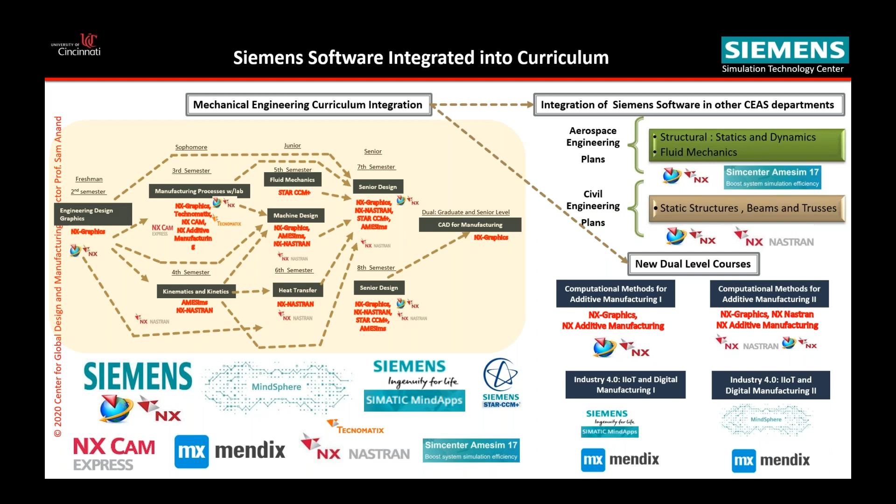So I'm going to talk about what's on the right side, more about the additive manufacturing and the digital manufacturing part. And then in the latter part of the presentation, Professor Kim is going to describe the integration into the undergraduate curriculum.

So quick outline here. We'll talk about the Siemens Center website and how we integrated Siemens NX tools into our geometric modeling apps that we use in our course, and then into additive manufacturing tools and apps that we use in our two sequence courses here. And then we'll talk about other tools that we developed in additive manufacturing compensation, lattice structures, and so on. I will describe specifically industry outreach and how these tools bridge what happens in the industry and how we are relating what happens in the industry to bring it back to the classroom.

Once in the latter part of my presentation, I will talk about the IoT and the digital twin integration in design and manufacturing with two examples of actual industry examples that we bring back to the classroom. So that is the agenda for my part of the presentation. On the right side, you see the set of menus and tools and examples of what we've integrated. That's what I'm going to go through.

So basically, if you look at it, on the right side, you see the manufacturing courses we have integrated. We have an undergraduate course of manufacturing process, a dual level course, which is a senior and a graduate level course on CAD for manufacturing, and computation methods in additive manufacturing 1 and 2. And eventually a dual level course in Industry 4.0 digital manufacturing. Now, some of these courses are completed, and some of these courses are in the planning mode.

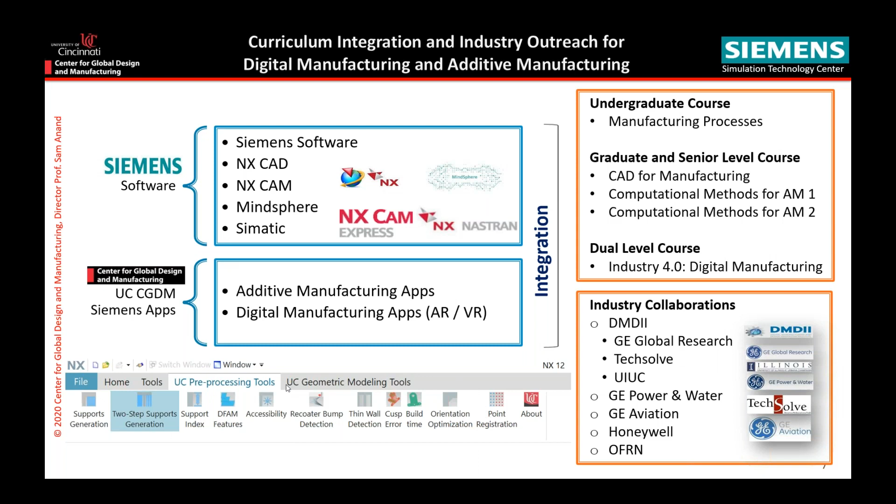The kind of tools we used on the Siemens tool set, you see on the right hand side, we use NX, NX CAM, NX CAD, MindSphere, Simatic. And then we also look at how we bring together some of these tools into the apps where it relates to industry. So I'm going to describe some industry collaborations that you see on the bottom right-hand corner. So those would be the examples that we bring back to the classroom. At the bottom of the window, you see an example of all the tools integrated into NX, some of our tools here, and I will show you some of these menus as we move along.

So first thing is we have a Siemens Center website. Obviously, all our tools, all our apps are sitting in this website, with case studies, examples of classroom integration that's replicable, and information on how to download this and install it and so on. All this is available at the UC Siemens Center website. It has a link to Learning Advantage from Siemens, so you can use either the UC website, the university website, or the Siemens website to download some of these tools if you wanted to.

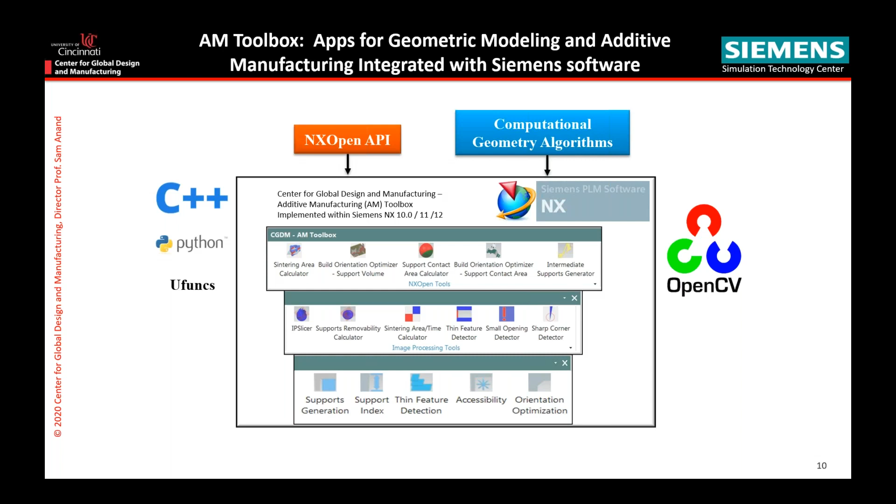So how do we go about doing it? Just a quick overview of the AM toolbox here. We integrate the NX API methods using C++, Python, open source software, or OpenCV. We integrate with computational geometry algorithms. And what you see are the menus that you would normally see on the Siemens NX. You would see some of our menus, so you can use it for the additive manufacturing apps here. So we write these apps, and basically they are DLL files that you drop in so that you can see these menus populated on the NX software itself.

So examples of geometric modeling apps here. This is taught in the CAD for manufacturing course, where we teach computational geometry, geometric modeling, curves and surfaces. Students are given assignments where they develop the algorithms and do the homework, but they can come back and verify it using the apps we develop. So it gives them reinforcement of what they learned by doing the homework and coming back on each of these things as part of the class.

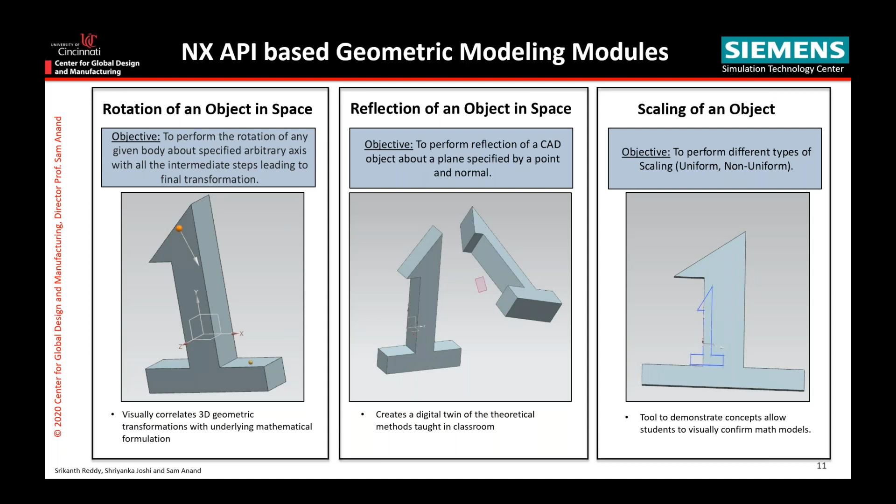And these are fundamental transformation methods here that we teach, so how one would go about doing it. All this is integrated into NX so they can seamlessly view it.

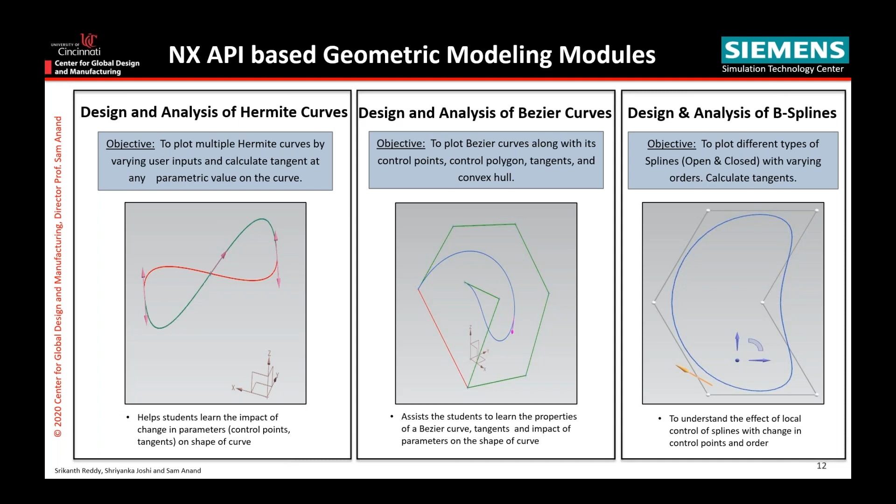Similarly, we teach a whole lot of information on curves and surfaces, everything from Bezier curves to B-spline curves in the first course. Students have an opportunity to take the homework and work on it in their own programming language, MATLAB or Python, but they can come back and verify these methods using the apps we develop here. All these apps are available within NX so they can verify their homework.

Example of surfaces, we teach different types of Bezier, B-spline surfaces, and so on. These are our own specific apps integrated with GUIs and so on, that students can use to verify it and play around, not only to verify their homework, but understand the concepts much better.

The idea of simulation is to give students an ability to play around, to look at what-if scenarios: what if I change this, what happens to it? That is crucial for them to understand and master the learning process here.

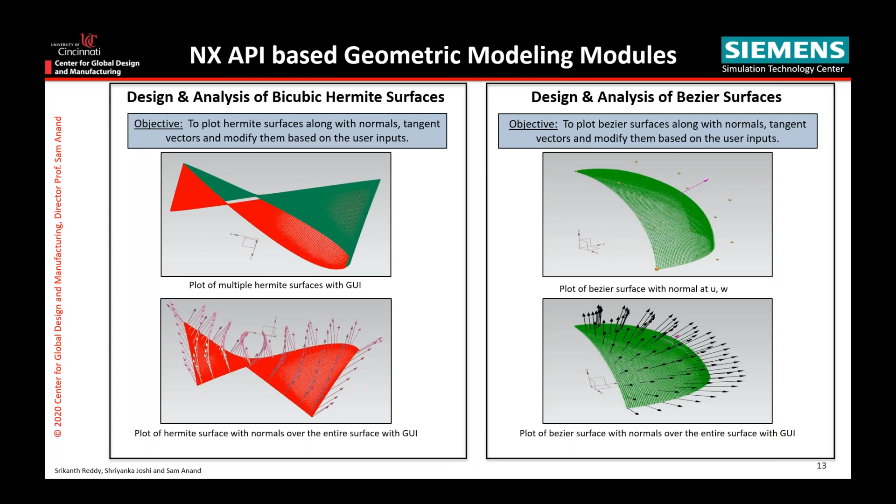So moving on, those were the geometric modeling apps introduced in the first course. In the second course, the additive manufacturing one, there's a whole bunch of additive manufacturing apps, including support tools, DFAM tools, support generation tools, build parameter tools, and so on. And then our own producibility index that tells you build orientation optimization.

All these apps are developed internally by us, and they work on any kind of part. You can take an STL file, or a neutral file, push it into NX, and then work on it from Siemens NX. So these apps are integrated into Siemens NX.

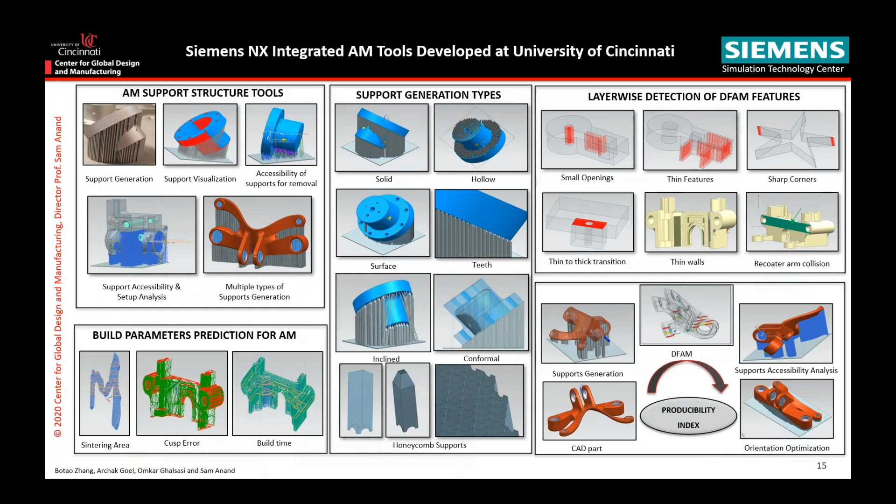More examples of these are the apps that are integrated, and basically you can see these apps as you work and as you see all those things.

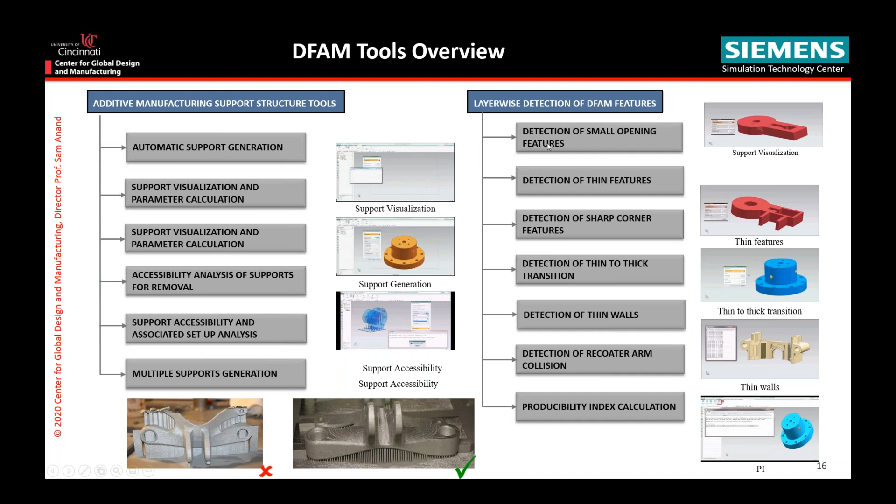So the bunch of apps you hear about, support structures, these are DFAM apps, and all of them are integrated. Here's an example of a DFAM app working. You can see how it goes through the process, does a layer-by-layer analysis, and then detects all the features. This is already integrated into NX, and that's what you would see.

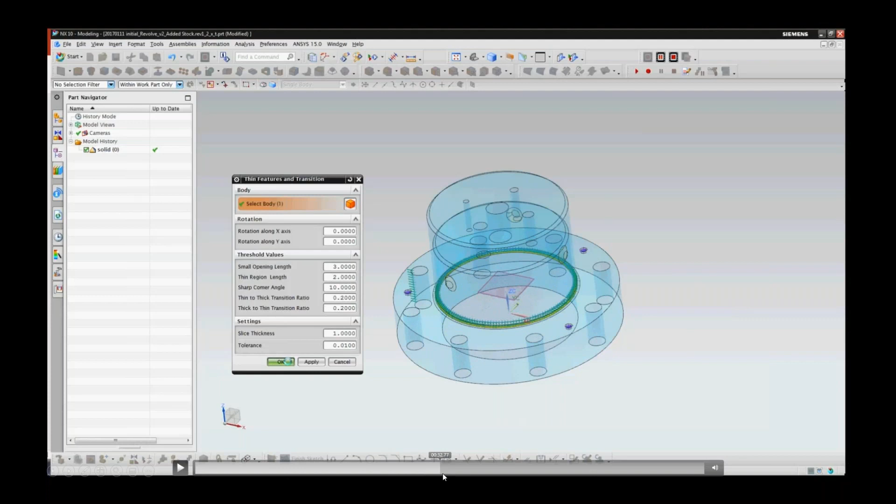So you can see the color-coded DFAM features that are highlighted here. That input is given.

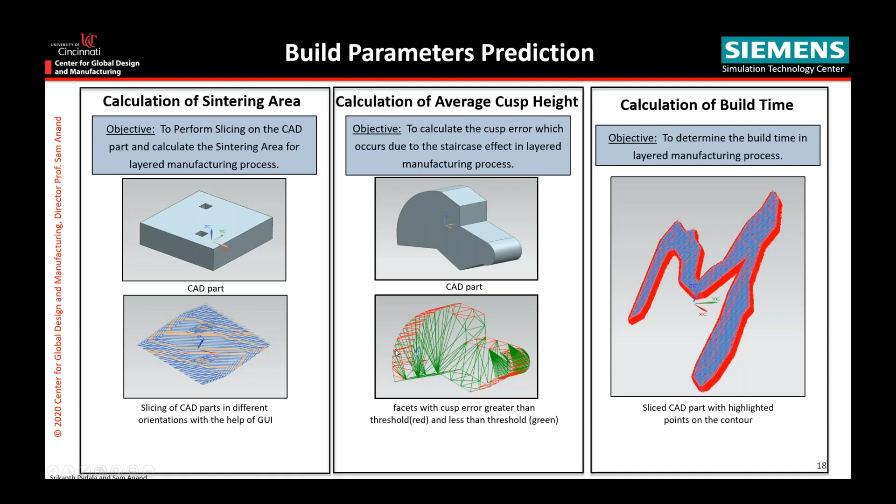We have more apps for calculation of sintering area, cusp height, and build time. All these are integrated. You can calculate the actual build time, cusp error. All this is working on the NURBS geometry or the CAD geometry of the part itself, so we're not working on STL files.

So all this is brought together into one final metric, what I'm going to call a producibility index, that gives us an idea of how to do build orientation optimization, so you can find the best build orientation for the part, particularly in metal additive manufacturing.

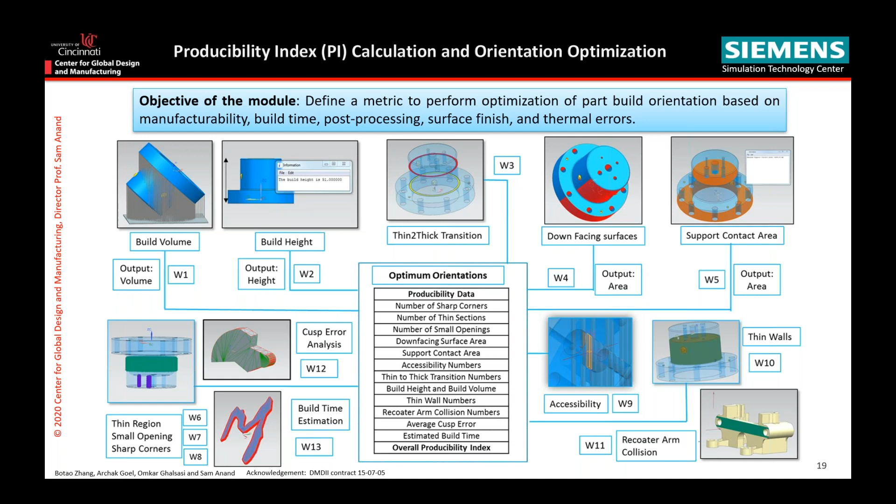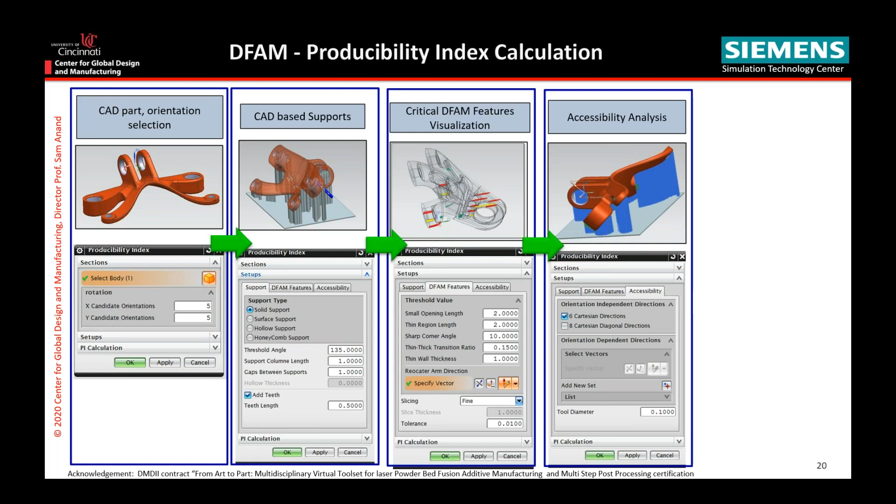Here's an example of the flow that will happen. You take the part, develop the CAD, and develop the supports there. Once you develop the supports, you look at DFAM parameters, do the support accessibility for removal of supports, and finally the orientation optimization. So this is how the producibility index is going to look like.

This basically goes through and looks at developing the part, the orientation, and then the build parameters. Finally, you can look at the producibility index by doing an orientation optimization here.

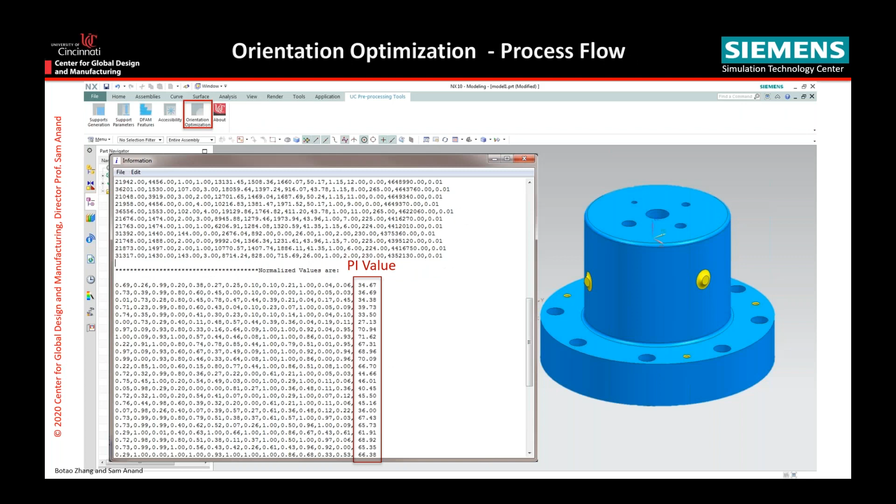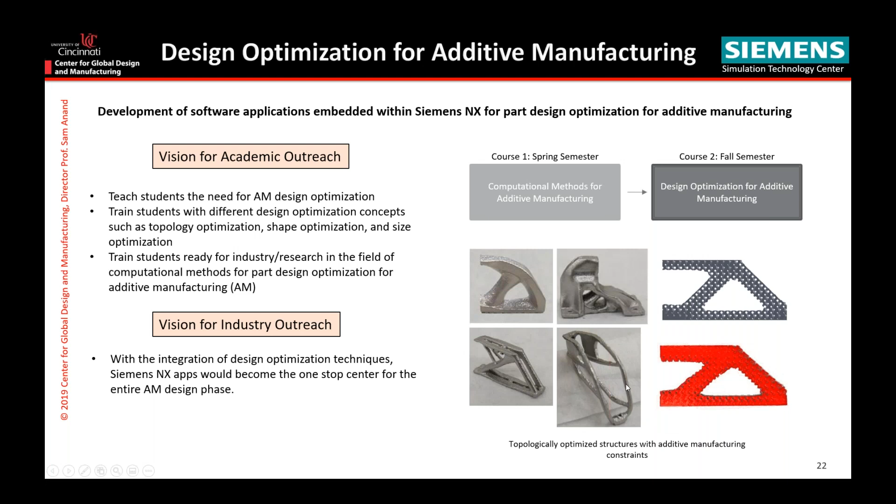So those are the set of tools, and we've developed a whole bunch of tools for design optimization, including topology optimization, lightweighting parts, multi-material parts, thermal compensation, build orientation for thermal compensation, topology optimization for AM parts specific to additive manufacturing, lattice structures, and multi-material lattice structures.

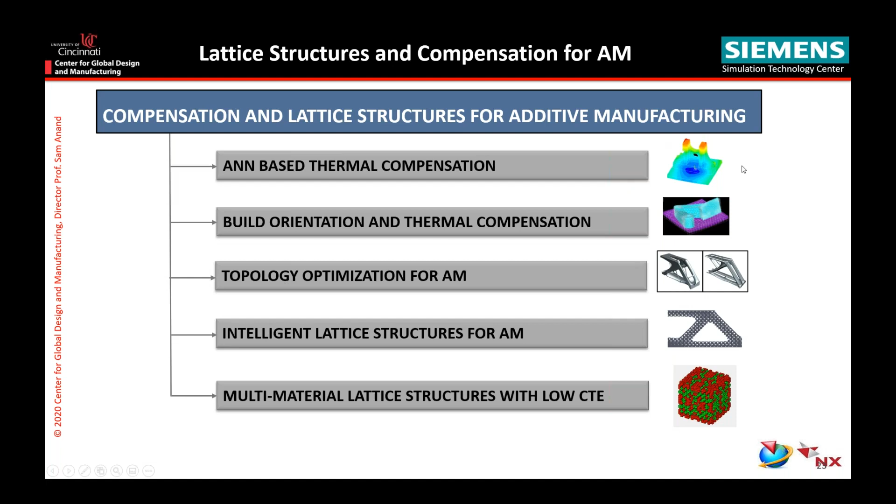We teach this in the second course of additive manufacturing. So that is our objective. Here is a repertoire of what you would see in these apps.

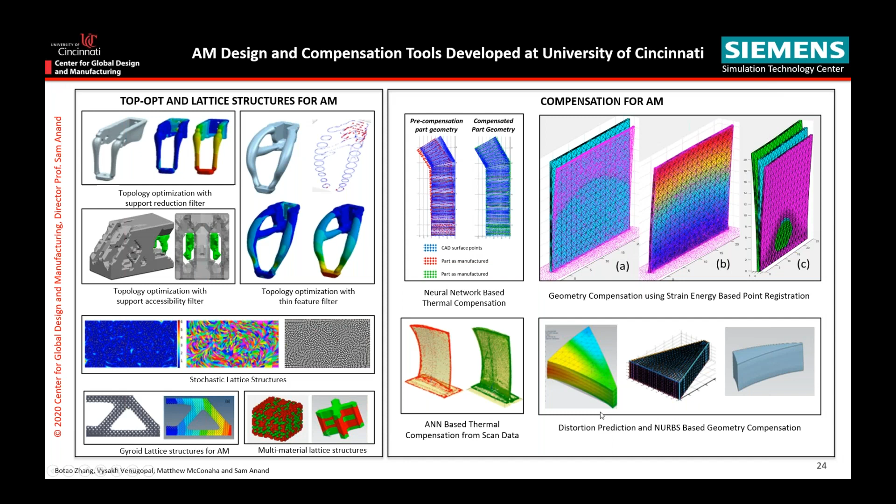Some of these are topology optimization specific to additive manufacturing with DFAM constraints. These are examples of lattice structures with multi-material lattice structures or stochastic lattice structures. This is an example of how we predict thermal deformation and do thermal compensation on the NURBS surface itself. We teach all these things based on the work we've done and on the industry contracts we work on.

To bring this all together, where does it all connect to the industry? These are examples of 4 industry contracts. This is a DMDII, a UI Labs federal government contract that we worked on with GE Global Research, an 18-month project on developing virtual certification of the metal powder additive manufacturing process. We worked with GE, University of Cincinnati, and Urbana-Champaign, and a couple other partners.

This is an example of work we did with GE Power and Water, using some of the apps I talked about and using orientation optimization. This is sponsored by Honeywell - a research contract where we're using compensation based on neural networks. And this is a contract from GE Aviation on using DFAM analysis.

So we are bringing together some of the apps that we develop into the industry, using it for industry and bringing that learning back to the classroom. That's the whole idea here.

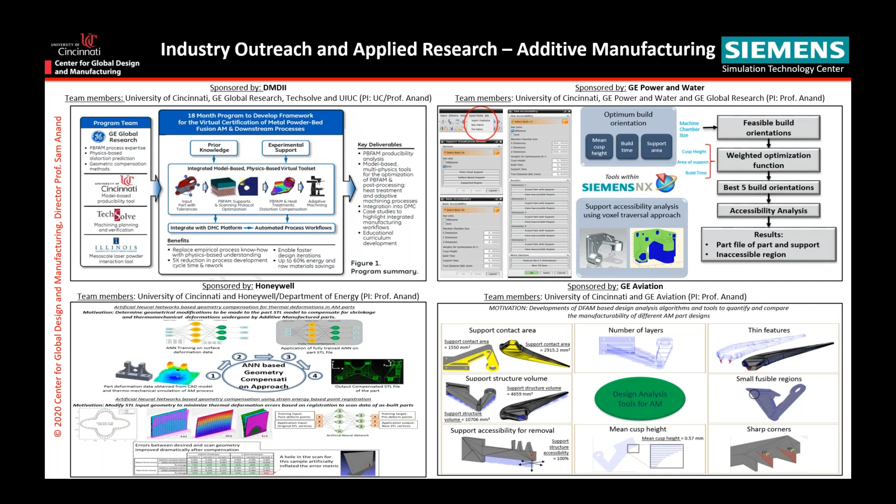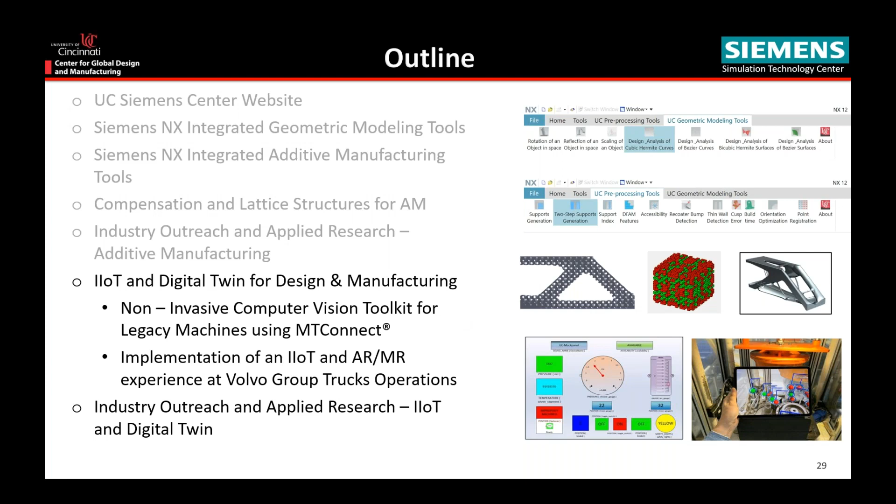So the second part, I've got a few things to talk about. Since Gil talked about digital twin and digital thread, we do a lot of work on IoT and AR, VR integration into the classroom, and we're developing a separate course on Industry 4.0, 5.0. So that is the course I'm looking at here.

We are looking at a separate course in Industry 4.0 where we're going to use Siemens MindSphere, SIMATIC, and Mendix for looking at IoT and AR, VR integration on the factory floor.

Just to give you an example, this is a DMDII project where we used computer vision cameras to look at older legacy machines and gauges and parts where there's no sensors, then video record those particular machines and the console. In real time, we analyze those values and push them through MT Connect, which is a standard, so that people can view it. We worked with Raytheon and Faurecia on this project.

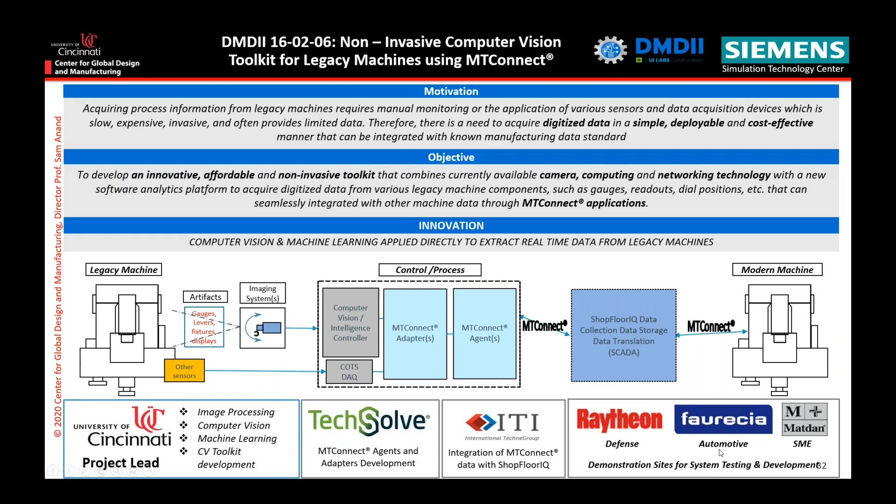Just to give you an idea, this is how it looks. This is a mock panel with all those values. These could be the gauges on a CNC console, or this could be the LCD panel on an injection molding machine.

So what we have is a Logitech camera looking at it - a $200 camera - recording images at 30 frames per second, analyzing each frame, getting the values, and pushing it into MT Connect. And this is the MT Connect output that you would see in an office far away or in a remote location. It gives you an idea of how we can acquire data from legacy machines.

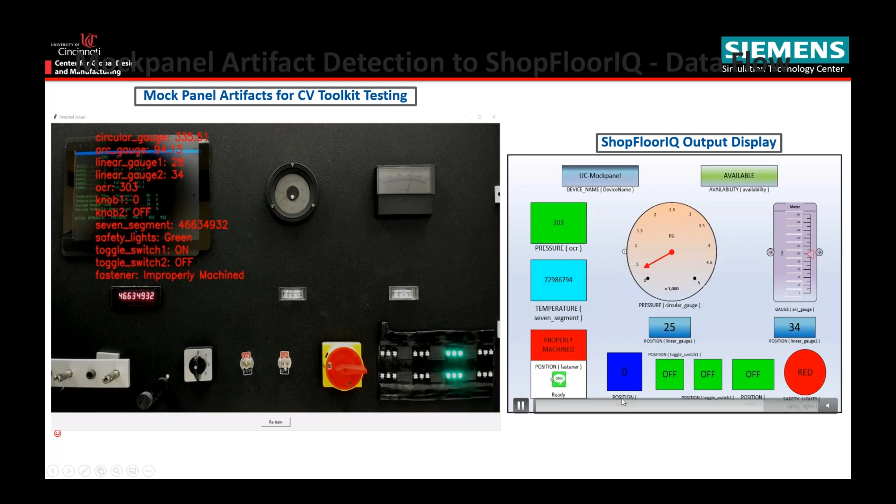So this is one of the projects we are trying to bring together into the classroom. A second project uses mixed reality, where we're using AR, VR, and mixed reality context so that you can use an iPad to look at a machine and gather sensor data on the fly. This is the thesis just completed by a student here.

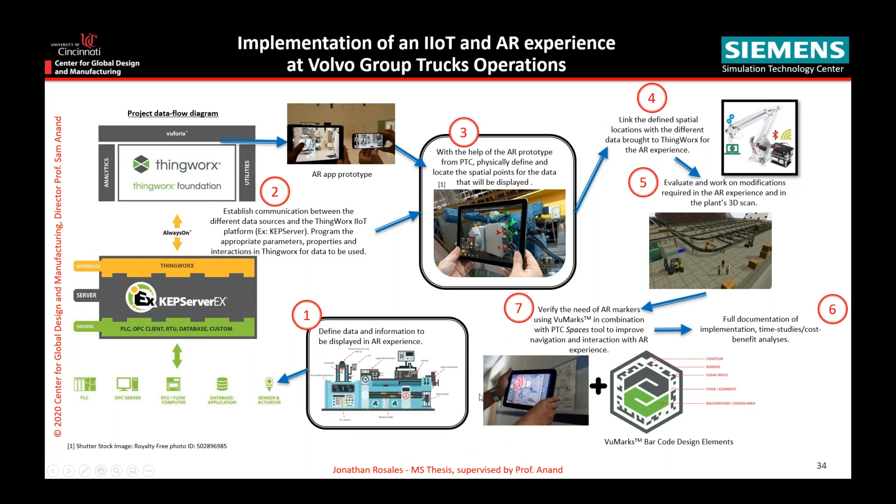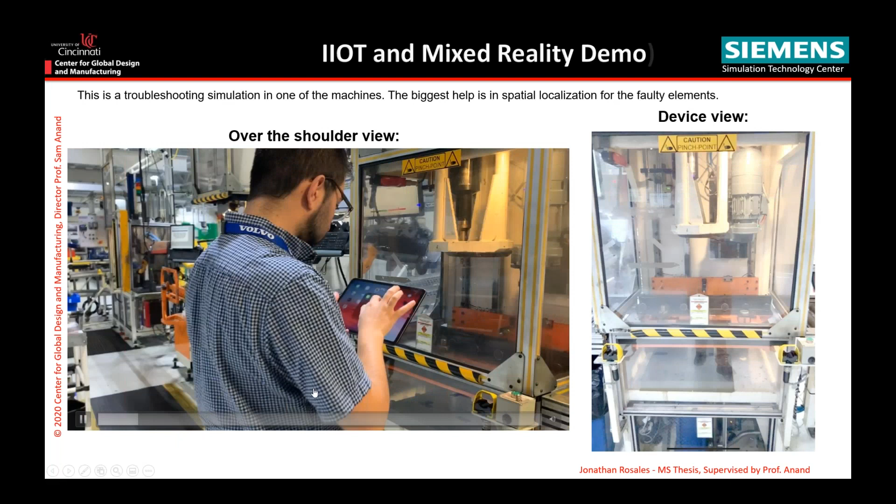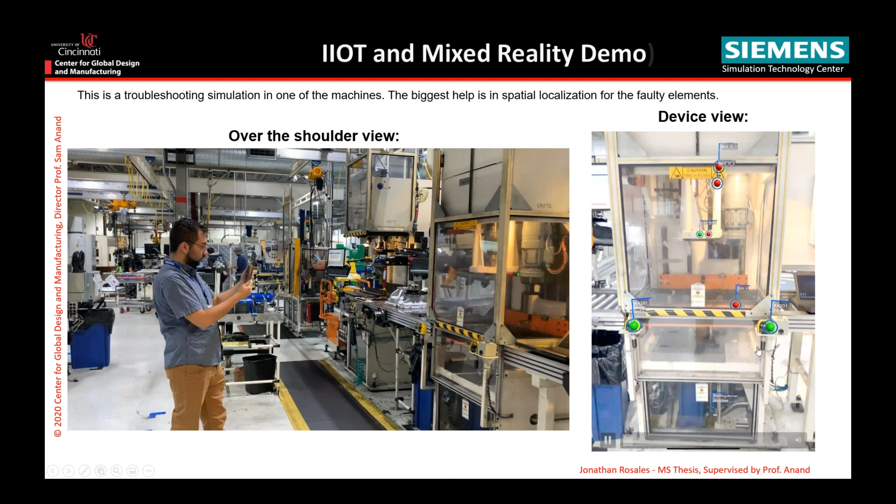Let me show you one video - this is a video of the student actually at a factory, the Volvo factory, looking at that particular machine. He's going to use his iPad to look at this machine and bring all the sensor values into a mixed reality interface so that all those sensor values can be looked at right there, and we can do it for any machine. All these green and red balls that you see are the sensors and their locations, and those are the values here - they come up automatically, pulling it from the cloud in real time.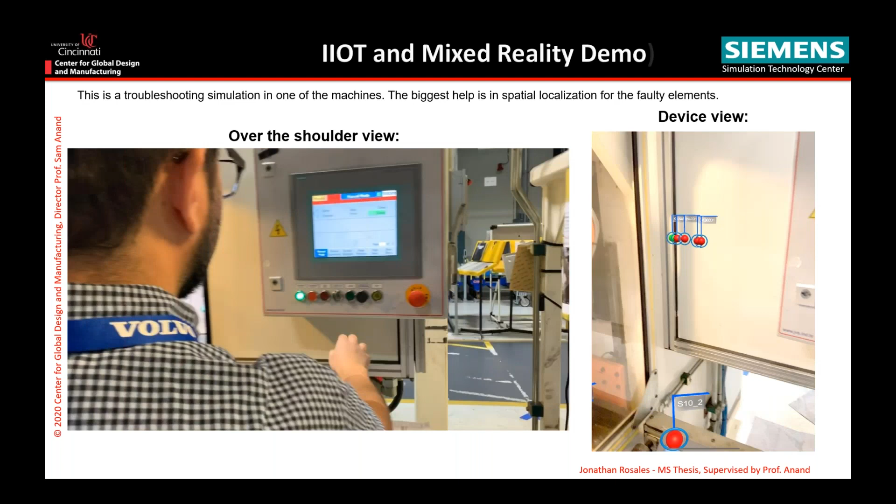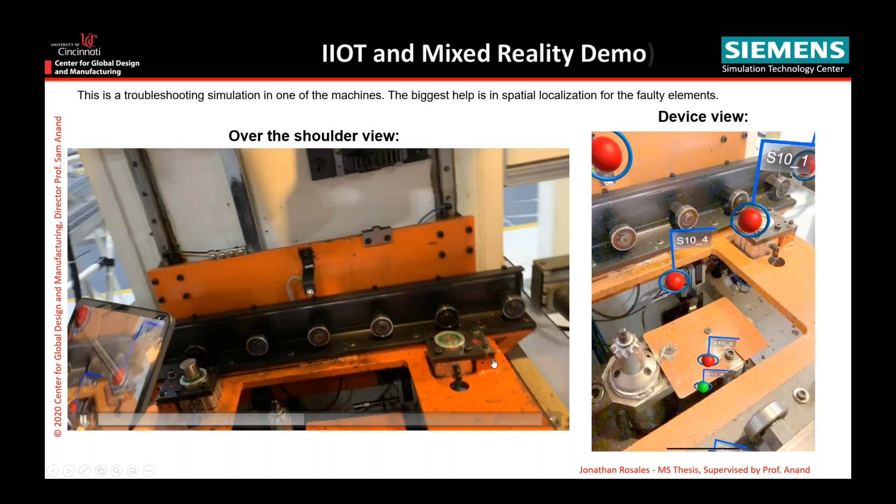So this is a project, and we're going to bring both these things into the classroom when we're done. As you can see, he's pulling up a particular value and correcting the value of this particular sensor. Once he fixes it, it's going to turn green.

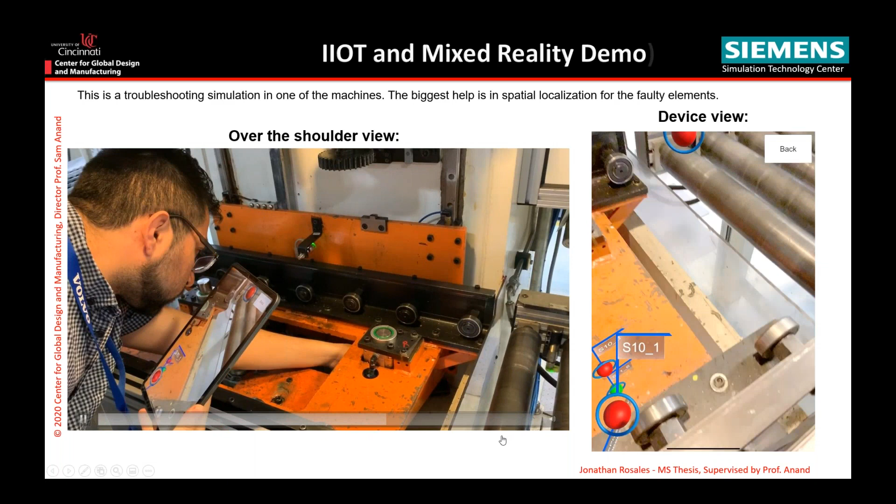So that is my part at this point. I'm going to hand it over to Professor Kim, because he's going to take over and talk about the integration of Siemens tools in the sequence of undergraduate courses in mechanical engineering. Krishna, if you can hand over to Professor Kim. Yes, it's handed over. Over to you.

Let me go to this slide mode. Okay, again, thank you everyone. This is the education-centric side of Siemens Center at UC. Basically, what we try is a new approach in engineering education, to take full advantage of the power of modern simulation technologies.

This stemmed from an obvious question. There have been tremendous developments in computing power and software technology, yet we were still teaching fundamental courses like solid mechanics and fluid mechanics pretty much the way we used to teach it 30 years ago when I first came to UC, or even 40 years ago when I was a student.

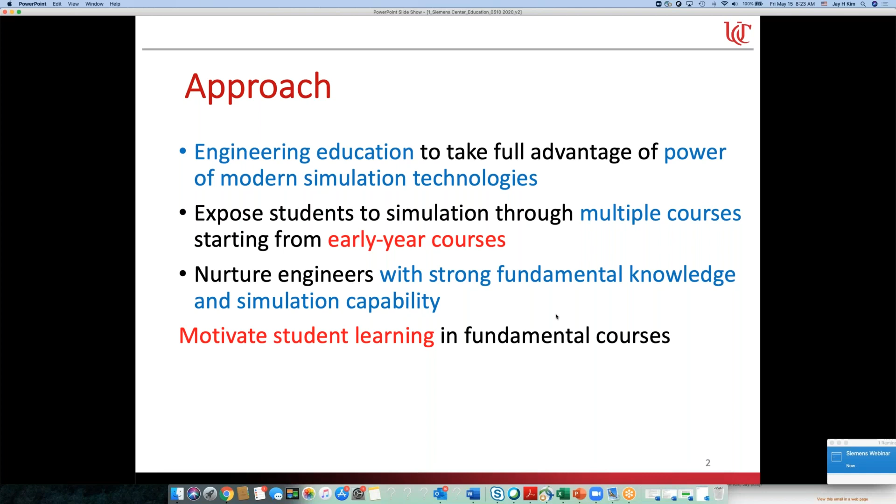These are the courses that we integrated in the series. It starts from the freshman course, engineering graphics, where we teach NX graphics as an essential utility. Students use NX graphics to make drawings in later courses, but also use it as a pre-process for FEM and CFD applications.

Then in the middle of the curriculum, we teach NASTRAN, FEM, in solid mechanics in the fourth semester. Then Amesim, which is a lumped parameter simulation software, in rigid body dynamics. And STAR-CCM, a CFD software, in fluid mechanics. And in heat transfer, again STAR-CCM is introduced.

These are truly fundamental courses that define mechanical engineers. Mechanical engineers are proud of having learned these courses, and these courses define mechanical engineers, but they also often give the biggest trouble to mechanical engineering students because they are so hard, so difficult to understand.

Later, we use this software in design courses. By senior year, our students are capable of using this software. Then, depending on their project of choice, they use NASTRAN, STAR-CCM, or Amesim, or multiple of them.

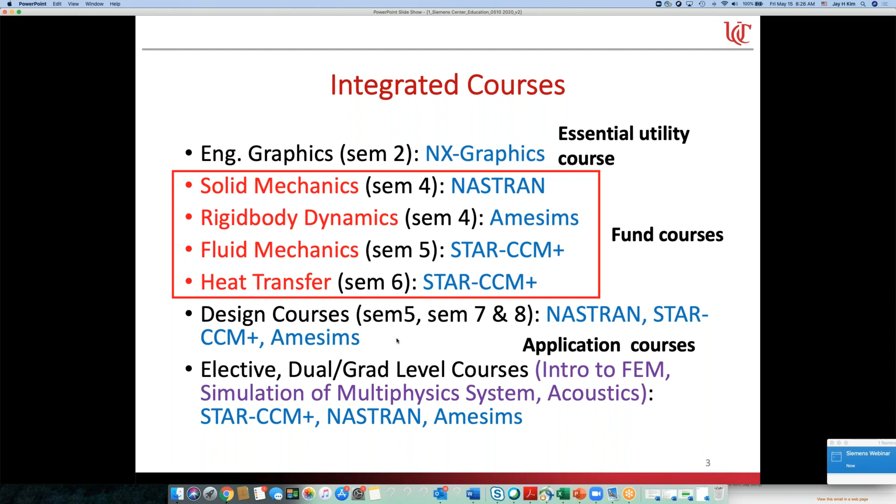Then a typical course module is designed in such a way that we usually give one or two very simple example problems, like a simply supported beam that you can easily obtain an exact solution for. Students do validation in both ways: simulation produces a correct result, and the theoretical process produces a correct result, in both ways.

Along the way, students develop understanding of basic fundamental concepts and theories. Then we have a relatively simple problem, but one that cannot be solved exactly. This is the way students understand the power and utility of simulation software, and why simulation software should be used.

Finally, a project that requires more realistic engineering thought. This trains students how to formulate a simulation problem out of an engineering problem, because in the real world, no problem is given as a simulation problem. You have to take the design problem or business problem, define it, and convert it to a simulation problem. They learn that, and also learn how to interpret the results and apply the simulation results to design.

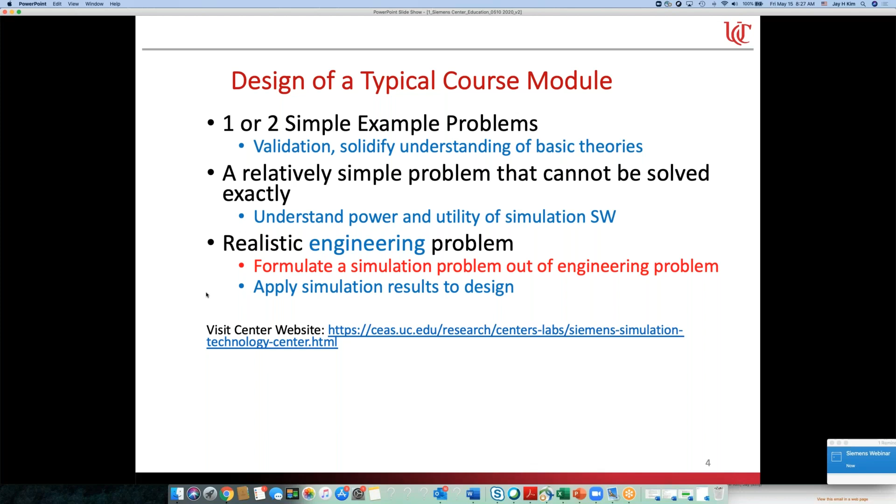Okay, so the first class is a graphics course. So we have a freshman full semester graphics course, as well as 2 crash courses that are delivered in maybe 3-4 weeks for students who transferred. So they didn't take our freshman graphics course, or all ME students have taken the freshman graphics course, but if chemical engineering students want to use NX, then they have crash courses to take.

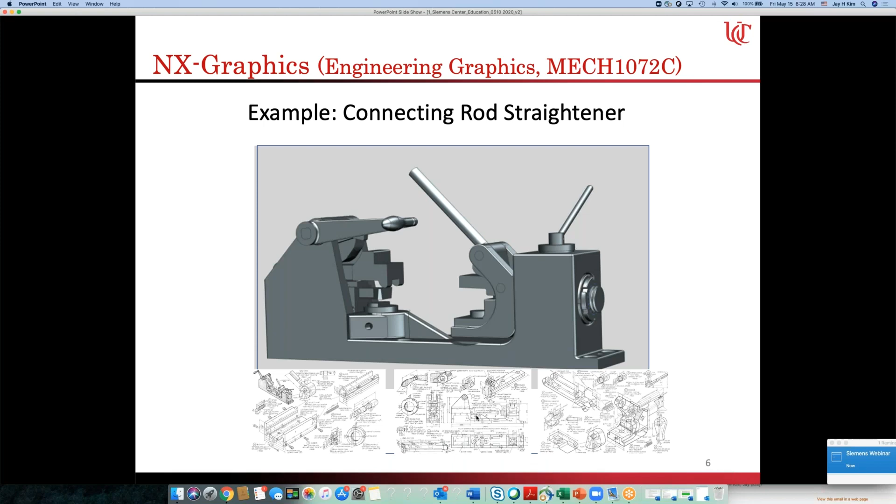So this is one example the student built using solid modeling. Then they make some exploded view, then 2D drawings, then bill of materials, those kind of things. So it's a typical design course, but we use NX graphics, which is the highest level, highly comprehensive design graphics software. Then also in this course, being the first course, we train the students so that they can self-navigate. In modern days, there is an abundance of information, but you have to learn how to utilize it.

Okay, so in this case, students are given resources like our Siemens Simulation Center at UC. We have a center website that Dr. Anand showed you just before. Then each course module is there. Then also some YouTube-based tutorials and so on that you can use. Then Siemens also provides Learning Advantage, which is really comprehensive. Then you can learn all questions from there.

Then also the software itself, like NX in this case, has documentation. Then we also have NASTRAN documentation. So students learn the ability to navigate through all this information and self-teach. And this experience carries to all other courses, okay?

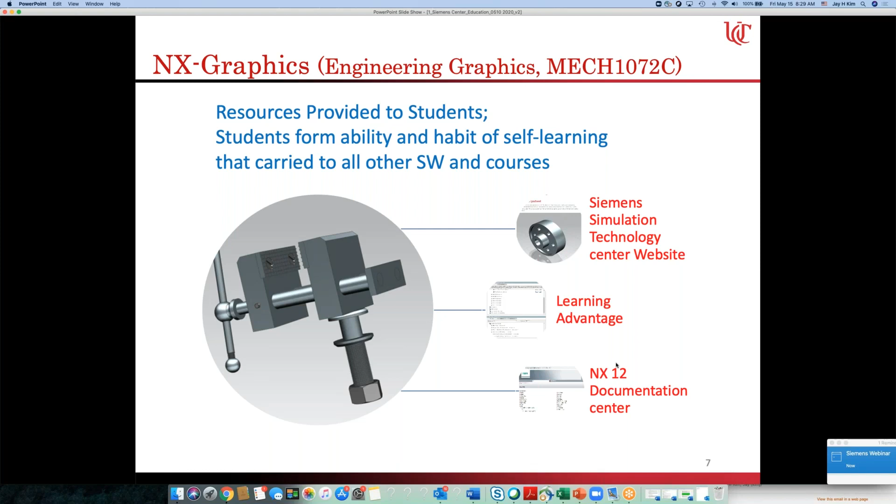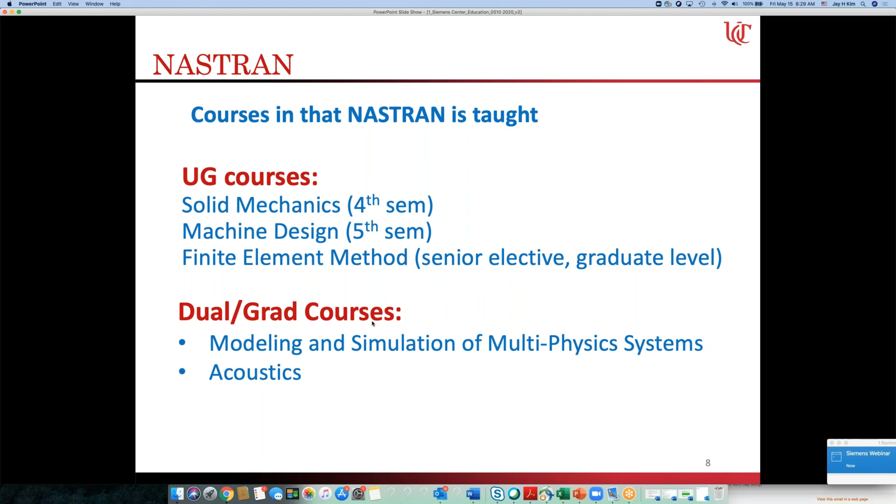So then NASTRAN is taught in undergraduate courses, solid mechanics, then machine design, then undergraduate FEM, then dual graduate level, then we have another FEM course too, then also modeling and simulation of multi-physics systems, usually industry-derived system problems, then acoustics, which you will see some examples of.

So this is solid mechanics. It's a combination of a simple problem and an intermediate problem. So this is an ASTM tensile test specimen. So one nice thing is in the middle section here, the exact solution works very well. The exact solution is very simple to obtain, simply force divided by cross-section area. Then students can compare the stress level.

Okay. Then if a 2D element is chosen, you have to decide on either plane stress analysis or plane strain analysis. So in this case, this is a plane stress problem. So such kind of teaching, as well as learning how to use NASTRAN.

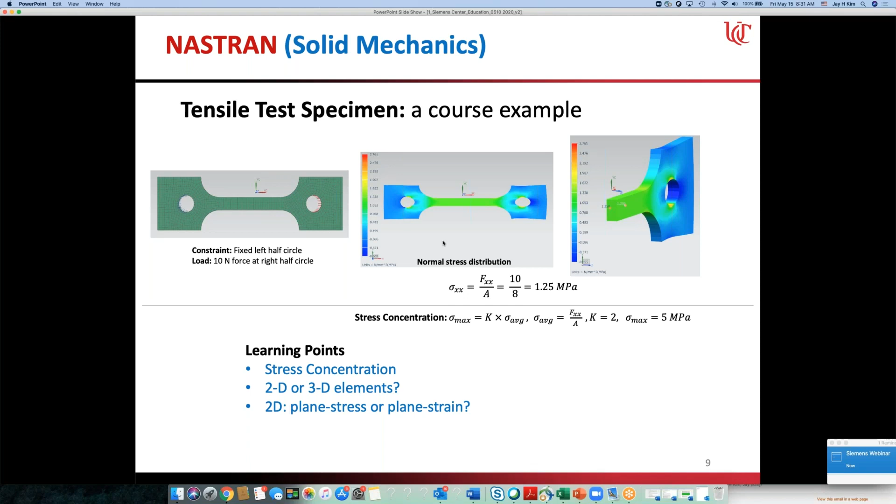Then this problem is taught in the elective senior level FEM course using NASTRAN, and the students solve a more realistic problem, in this case, a bike structure chassis, okay? Then first they do stress analysis and deflection analysis. Then they have to decide what kind of load cases they have to use. Then the impact factor, how it has to be reflected, that kind of thing. Then the problem is converted to an FEM problem, okay? Then they can solve it.

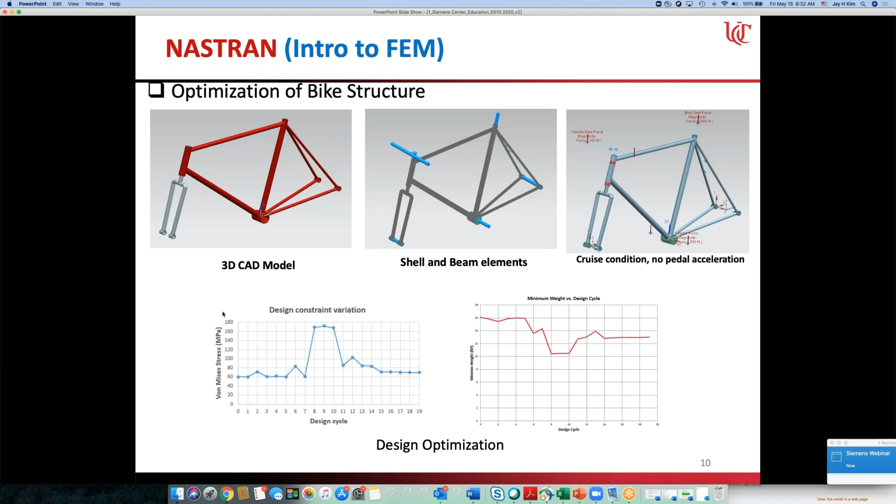Then further, they learn how to do design optimization using the built-in function in NASTRAN. So in this case, this is a constrained optimization to minimize the weight. Okay, so of course, this is possible because this is senior level and the students already have some experience.

Then this is an example of acoustics. So basically here, this is an expansion chamber like a muffler. Then they obtain the solution and compare it with the exact but 1D-based solution. Then also they check structure-acoustic coupling. Does coupling have to be considered?

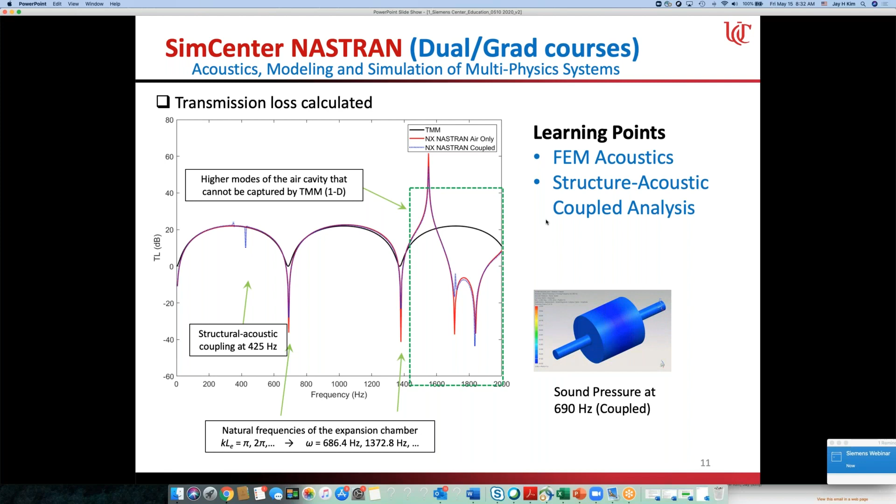So the learning points, the biggest one is that acoustics problems can also be solved by FEM, okay? Then the structure-acoustic coupling case. So that's what students learn. Then of course, not to mention design of the expansion chamber, the concept of natural frequencies, those kind of things. Then Amesim. Amesim we teach in rigid body dynamics and multi-physics systems too, also to support student activities.

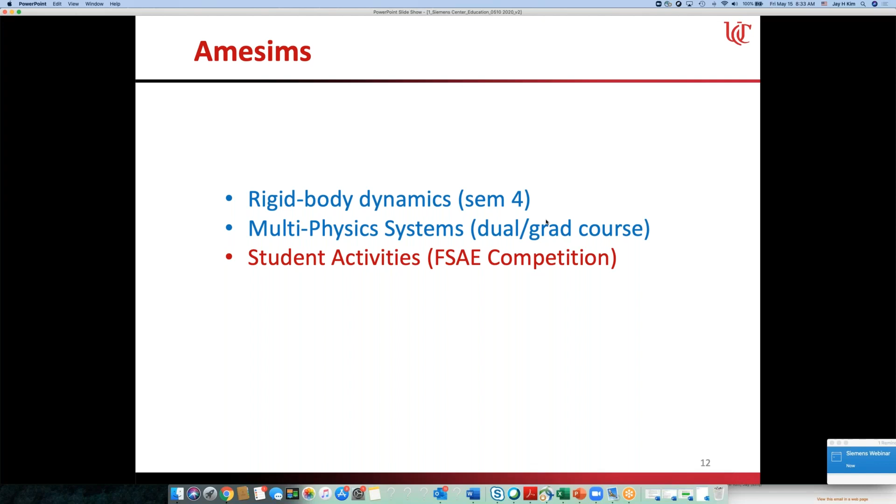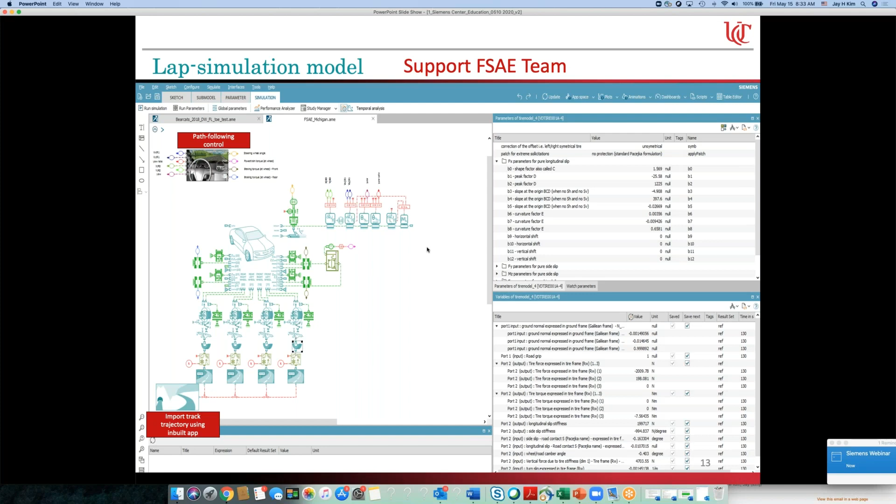In our case, Formula SAE competition. Formula SAE is a student competition; each year they build a race car, a miniature race car. So this is to support that. Then we help the students develop a full car body model for suspension design, then lap simulation, then also some force history in components, that kind of thing.

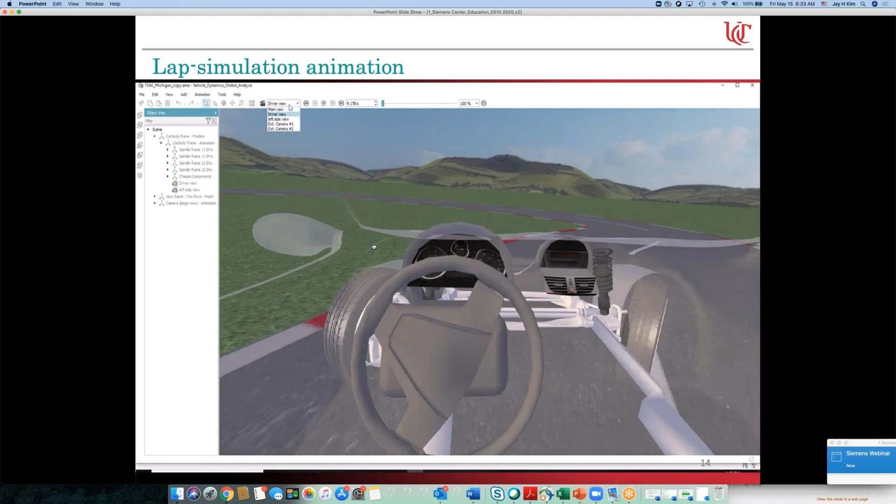So this is a lap simulation animation. The Formula SAE team typically has about 20-30 students. So with this, they can have a virtual model and simulate lap races several times before actually going there.

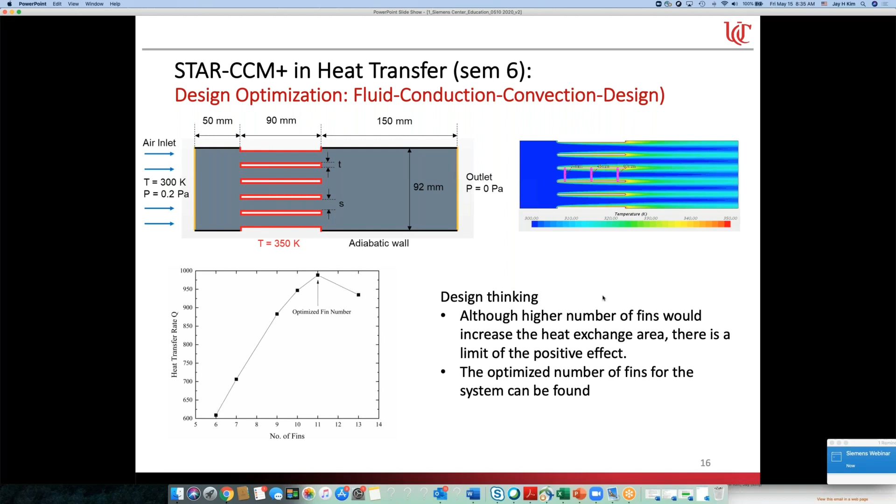But at some point, too many fins start to restrict the flow. So the flow velocity becomes slow, and with forced convection, you have a smaller heat transfer coefficient. Because of that, it provokes some design thinking in students, like optimization. So adding more doesn't necessarily mean a good thing, okay? Then, doing this, students also learn convection, conduction, those kinds of things, while applying that to realistic problems, not simple textbook problems.

So then they are ready and capable of attacking more challenging problems like aeroacoustics problems or aeroelasticity problems, then flutter problems in airplane wings, those kinds of things later in their career.

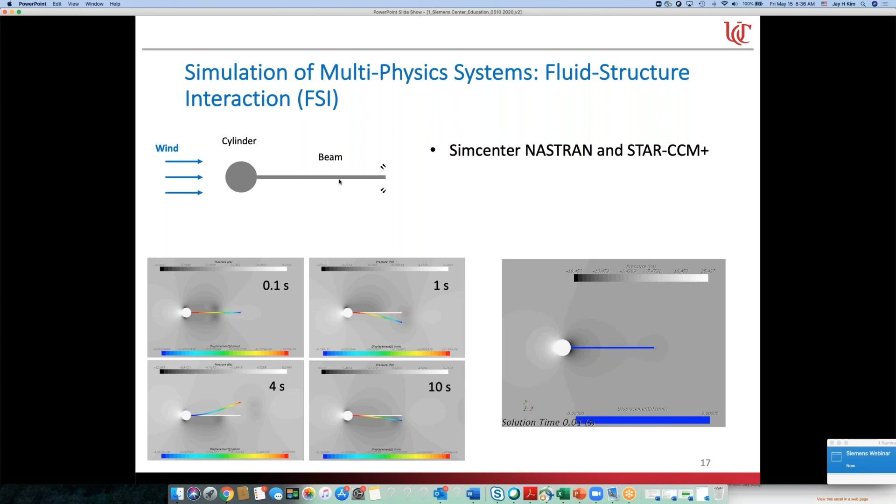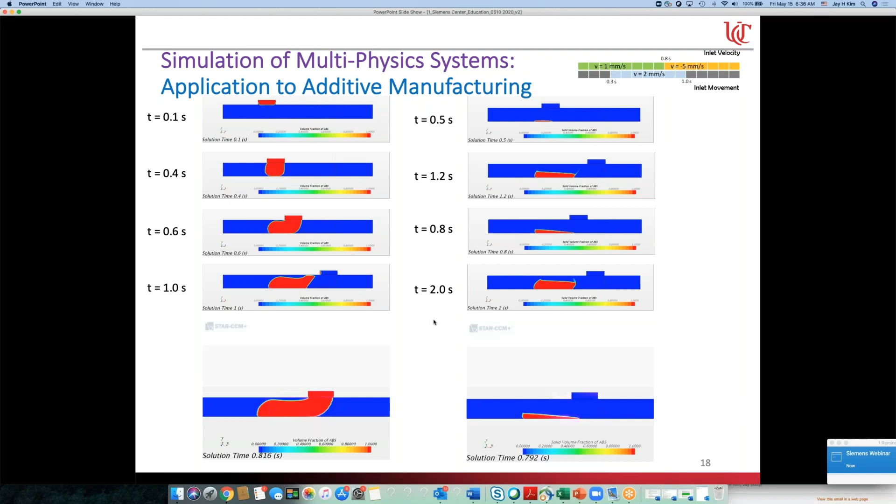It shows how the moving conditions can be reflected, how the heat transfer analysis can be done, then how melting and resolidification can be simulated, even though this is highly simplified. So that's actually what we have been doing.

So then, in reflection, I would like to summarize what we have done and some potential next steps. We have been trying to modernize engineering education, and I believe we can do a much better job this way. It has been 3 years since we started this new approach. Students like it, and faculty love it, because certainly not all faculty are equipped to teach simulation technologies in their courses, but they can get the help. And we also provide course modules.

Not to mention students; especially since UC is a co-op school, students learn this software and simulation technologies, then actually apply that in their industry co-op assignments. They get a good reputation and praise because they are capable. What some engineers in industry cannot do, our students can do. So, of course, students learn better in my mind. However, we can do better.

First of all, because of limited time, we have been doing this about 3 years, or including preparation time, maybe about 4 years. So far, this has been done only in mechanical engineering. Obviously, the same approach can or should be expanded to other programs in our school first. I think expanding this to aerospace engineering is the simplest because, to some extent, aerospace is a special subset of mechanical engineering.